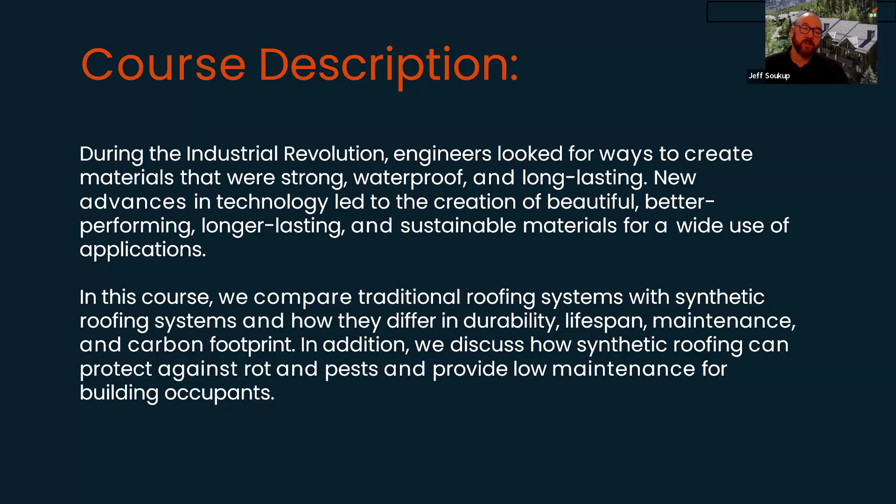In this course, we're going to look at some traditional materials, some traditional roofing systems. We're going to look at some synthetic roofing systems. A lot of this, we are going to be talking about exterior building products as a whole, so we're not going to be bogged down in roofing. So for the roofing aficionados, sorry to disappoint, but we will talk a little bit about everything.

Our learning objectives today. So again, just looking at the history of synthetic building materials, what was really the impetus for the creation of these materials, and then how did we create these great products? Look at some of the traditional building products that were natural materials that have largely turned to synthetic.

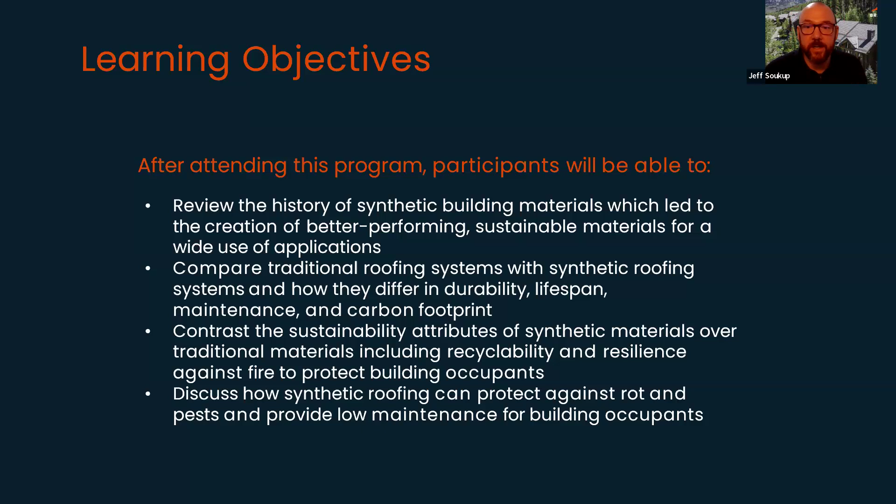Compare and contrast some of the sustainability attributes of synthetic materials over traditional materials, looking at their recyclability, their durability, protection against fire, and then finally looking at synthetic roofing, how it can protect your structures from rot, pests, wind, or other problems that we're dealing with frequently.

So this light bulb is just a little bit of an example to kind of prime the pump. So looking at innovation, without innovation, where would we be today? This light bulb is an example of, we've gone from the traditional filament or Edison bulb to our new LED bulbs.

I can set my current LED bulbs using an app on my phone. I can sync them up to my Spotify playlists or my playlists. They're tremendously smart or efficient. They cost less. Their life cycle cost is very minimal. They are the norm or the standard.

We've actually restricted the ability to manufacture and sell old filament bulbs because these LED products or other current light bulbs are just a better product, and they've come to be through innovation. We've tired of replacing the old bulbs, turned to a more energy efficient product, turned to a more durable product, and we've changed the norm to where they are the standard now.

With that kind of thought process or that type of innovation in mind, we're going to look at other exterior building products that have made that transition from natural material to a synthetic counterpart that in many ways is a better performing, lower cost, and more efficient product.

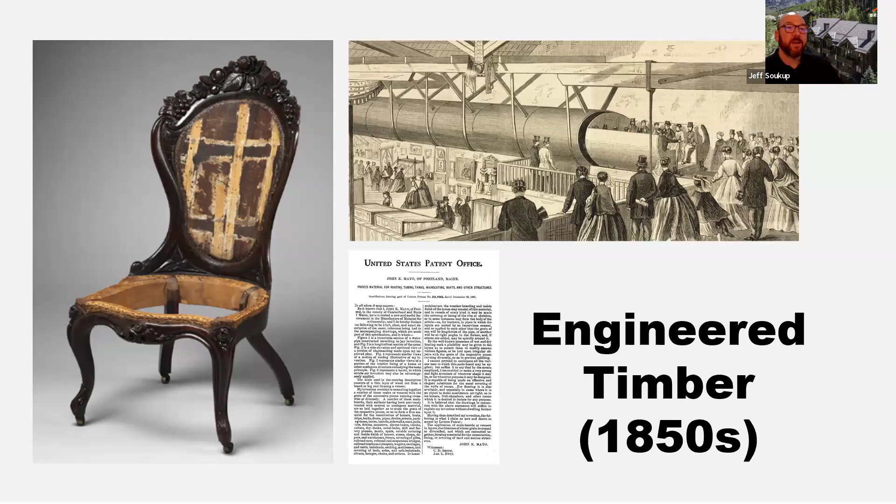The next, celluloid. So this is the first semi-synthetic plastic. Celluloid was created again in the mid 19th century, post Gilded Age. When you were a distinguished family, you always had a billiard table, and at this time we had really decimated the elephant and rhino population throughout Asia and Africa. So, billiard balls require ivory. All of the ivory supply was fairly decimated, so they were looking for substitutes. So again, kind of doing more with less, creating substitutes for things. A billiard ball manufacturer in New York City decided to create a $10,000 contest for anybody who could create a suitable replacement for ivory.

And John Wesley Hyatt and his brother created celluloid. So celluloid is a mixture of, I believe, cellulose nitrate and camphor. It is a really great material, holds solid over a great range of temperatures, can be polished, has a great hardness, and can hold colors very well. They ended up winning the contest. They were never paid, but John Wesley Hyatt went on to form the Albany Dental Plate Company, where he manufactured, among other things, billiard balls, dental implants, combs, piano keys, everything that we really associate with ivory. But they also were very formidable in the injection molding process.

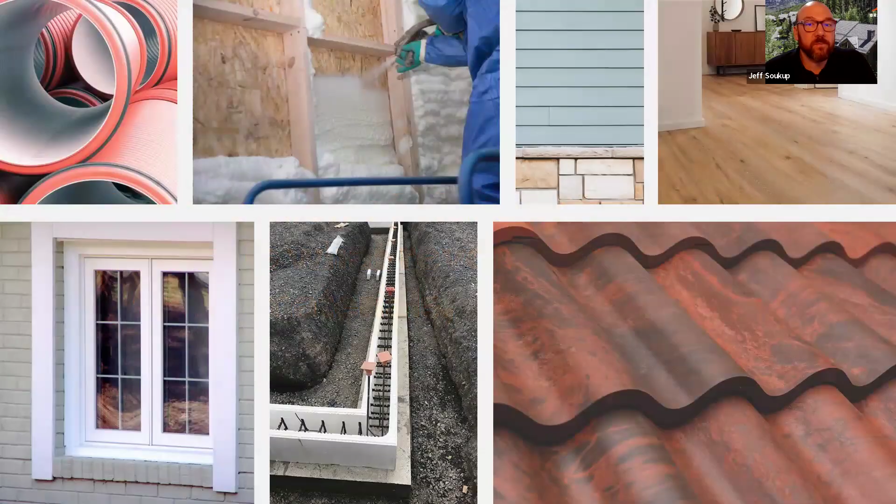Today, building is plastic. The construction industry is the second largest user of plastics, the first being CPG, or consumer packaged goods. I'd argue that the construction industry is a better steward or user of plastics, by and large. We're using these for long-term material use. We're using them because from top to bottom, they're high performance, durable, and now we're turning the tide where these can be considered sustainable products if they're manufactured correctly and utilized correctly.

So just looking at some of these product categories that have gone from a largely natural material to synthetics, starting with siding. So siding receives a ton of attention because it protects our buildings from the outside elements. It's what we're looking at mostly. Vinyl siding has improved tremendously over the years. It's very durable, it's affordable, has very consistent colors, and can remain virtually maintenance free over its life.

Engineered wood siding, if you're moving up, looking at some of the really great engineered sidings available, can mimic the look of natural materials at a fraction of the cost, and even your composite materials or fiber cement. These are manufactured with durability and longevity in mind.

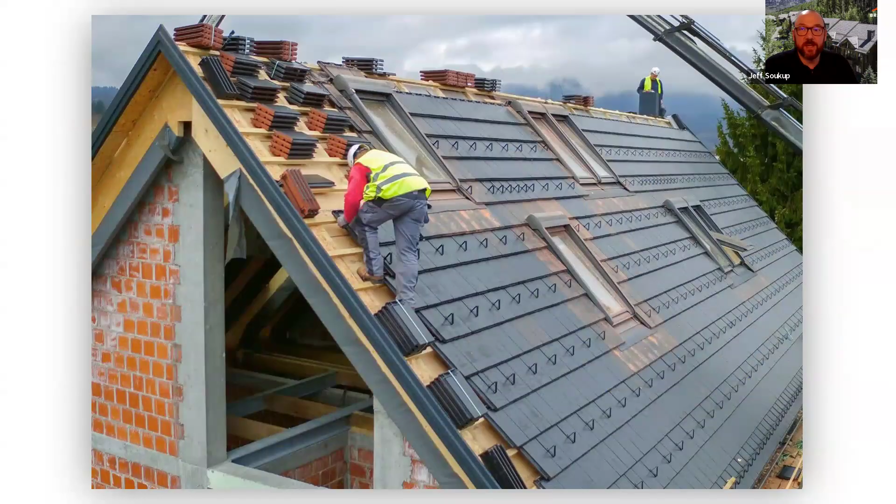The maintenance, even the installation is becoming more difficult, finding the skilled artisans to install these materials. I know we're joining from all over the country. Regionally, you can probably find a good slate hanger, but in many areas of the US you cannot. So looking to find different options that can achieve these visuals, not having to over engineer your roof structure to accommodate the weight of these tiles, is something you want to consider.

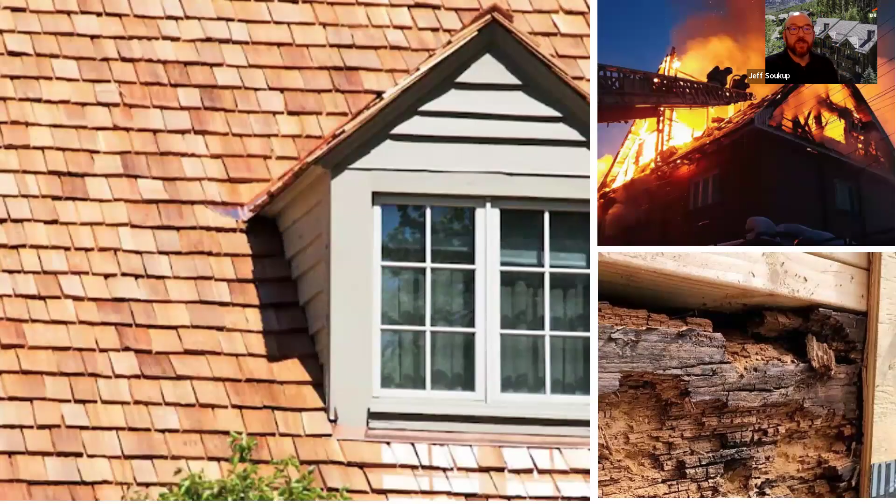These materials will last forever, or a very long time, but these days they can be difficult to maintain and keep looking beautiful. Cedar shake, or different shake materials have been a big challenge for a lot of people in recent years, with the continued problem with wildfires, deforestation, and then just getting insured is becoming increasingly difficult. So seeking out products that may replicate this, and be a little bit easier to maintain and install over the course of their life is worth considering when you're specifying material.

The costs associated with having these materials is not just with installation. There is a cost to our environmental impact. So are we deforesting? Are we mining or quarrying for slate? Most of the slate that we're seeing in the States around here is being imported these days. Thinner profile, not as nice colors, a significant carbon footprint being transported to the U.S. Just a lot of things to consider.

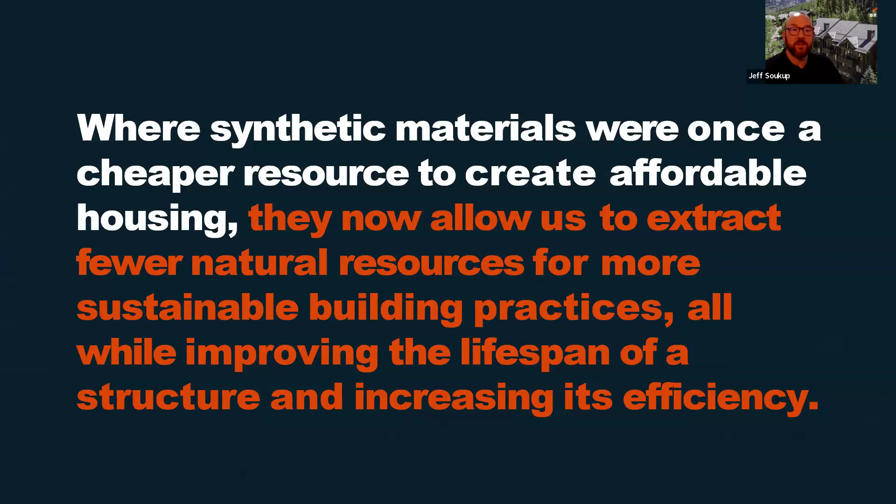If there are materials that are manufactured from recycled existing materials that we can repurpose for roofing, that would be a unique option. So this is where I'm going. A lot of these synthetic materials are recycled, so it's very counterintuitive to where we are today. We've been told plastic is terrible for the environment, but it can be a bit of a misconception that if a material is existing and we can recycle it, then it's counterintuitive, but we can take a plastic and turn it into a roof, and it can be very sustainable. So just looking for these opportunities is keeping an open mind.

So looking at some of these roofing materials, synthetic roof manufacturing has come a long way. We can replicate many of the existing looks out there, and you're not going to see the degradation that you would over time. Gen 1 of synthetic roofing had a lot of issues. If you think about it, you take a black piece of plastic, put it on a roof, and let it bake in the sun, you're going to have some issues, and a lot of lessons were learned over time.

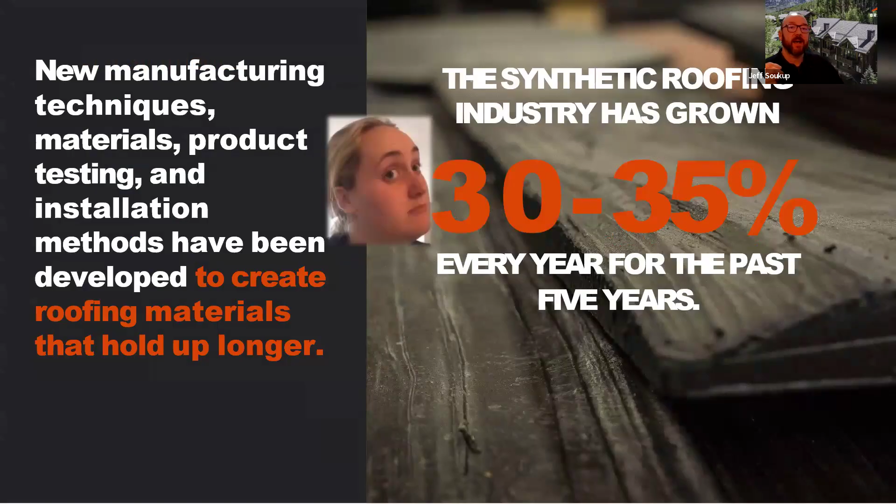There are a lot of manufacturers that have come and gone, but the current manufacturing process, the advances that we've made in polymer technology and manufacturing technology have improved over the last 5, 6 years now. The industry itself has grown 30 to 35%. So real significant adoption. We're still in a very early adoption phase of synthetic roofing, but it's becoming a bigger and bigger category in the roofing industry as every year goes by. Now modern synthetics are considered high-end, premium products. You can achieve some really beautiful looks with these.

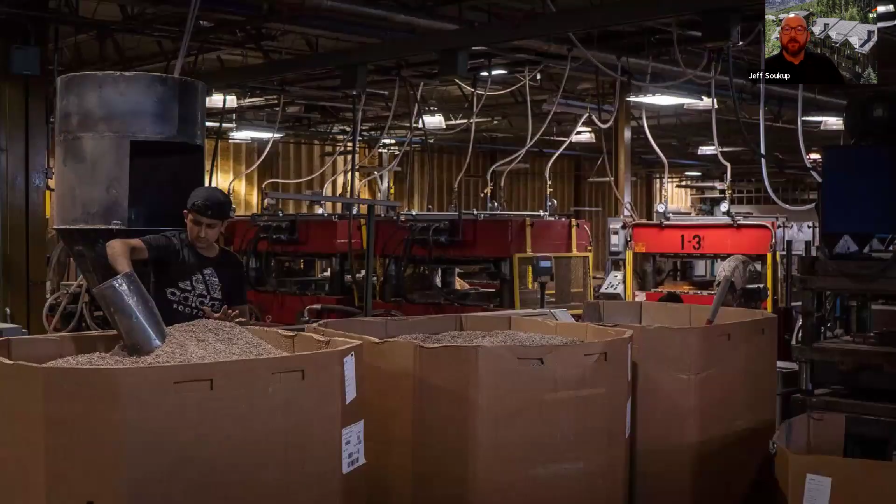So looking at some of the synthetic roofs, what are they made of? A lot of the times, what are your products made of? Mostly plastic, some rubber. Some manufacturers are using mostly virgin material, where many manufacturers are using recycled content for this.

Using both types of recycled content, so your post-industrial and post-consumer. One of the biggest challenges that we have as a manufacturer: post-consumer, we still as a nation are not very good at recycling. So with post-consumer it's very difficult to find a reliable, consistent stream. But whether it's post-industrial or post-consumer, we're still diverting material away from the landfill, trying to flatten the curve of embodied carbon.

Then just looking at, I'm getting ahead of myself, but the ability to recycle after a useful life is very important. Mineral pigments are big in the industry. Mineral pigments or inorganic pigments are not going to degrade like a synthetic pigment would under UV. So we use mineral pigments like carbon black, red iron oxide, green earth, azurite, your burnt umber, indigo, all of these to really get that very durable, UV resistant, fade resistant color that you see with natural products.

As I was saying, many of these materials are made from recycled materials themselves, but they're also able to be recycled at the end of useful life. So it's not as simple as going down to the local recycling center, but many manufacturers do have recycling programs. You can get that big green bag, take all of your roofing off and send it back to the factory, and it can be turned right back into another roof.

So one of the bigger questions that we get is how are these roofs tested and how do they perform? The biggest concern, obviously, is fire. Plastic burns, we know that. So how will it perform? For fire, synthetic roofs are tested exactly the same as any other roof product would be: the UL 790 / ASTM E108 tests. So this is three different tests.

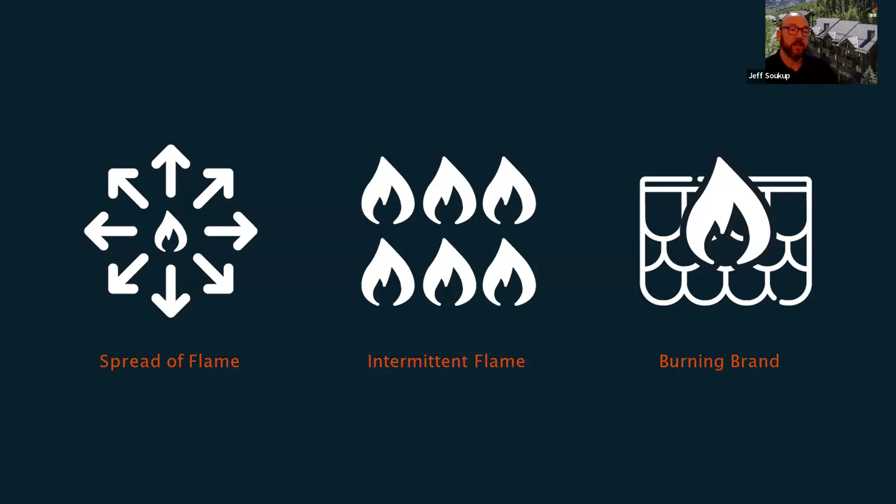The burning brand test, which you see here: essentially we just take a burning satchel, throw it onto the roof structure and see how it burns. Does it go out? Does it continue to spread? Your spread of flame tests and your intermittent flame tests. So these are all meant to mimic how a roof would interact with a fire in real life. After these tests are done, the results are aggregated, and then your roofing material is assigned a classification, Class A being the most effective, Class C being the least effective.

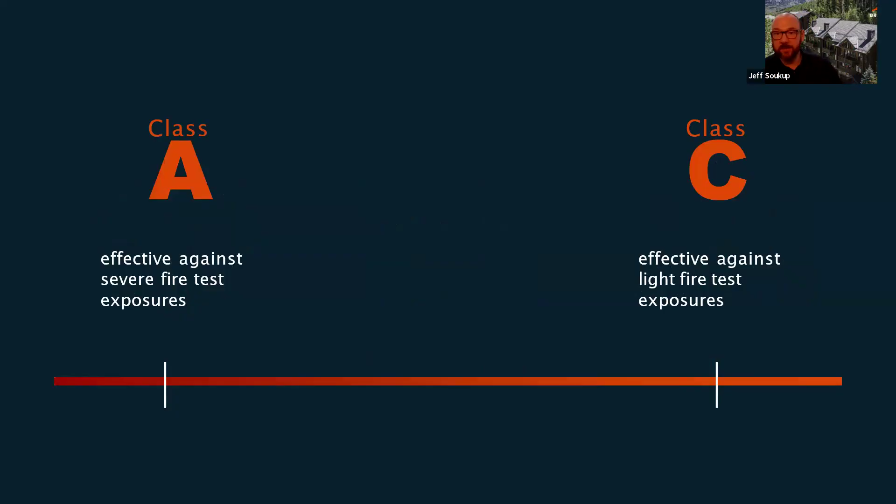So not getting crazy here with the naming or the classifying. Most synthetic manufacturers will receive a Class A or have a Class A option. Many of these manufacturers will have a Class A composition tile and then also a Class A assembly.

Impact resistance is a big one these days. I think in the mid 90s, a bunch of catastrophic storms came through the Midwest and devastated many roofs out there. The insurance industry wanted to develop a way to evaluate roofing materials, so they came up with the aptly named steel ball test. Essentially, we drop a steel ball from 20 feet, graduating from 1.25 to 2 inches. You drop the ball twice from 20 feet in the same spot and then evaluate for moisture penetration afterwards. So this will tell you how resilient your roof is to impact.

Many of the leading synthetic manufacturers will achieve a Class 4. There's also a bit of a misnomer as far as Class 4 or impact resistance goes. When I first joined the industry, I thought impact resistance would prevent moisture penetration, but my roof's also going to look nice afterwards. This doesn't tend to be the case. A Class 4 impact roof will still dent; a standing seam or an asphalt can be a Class 4 and still show a lot of signs of dents.

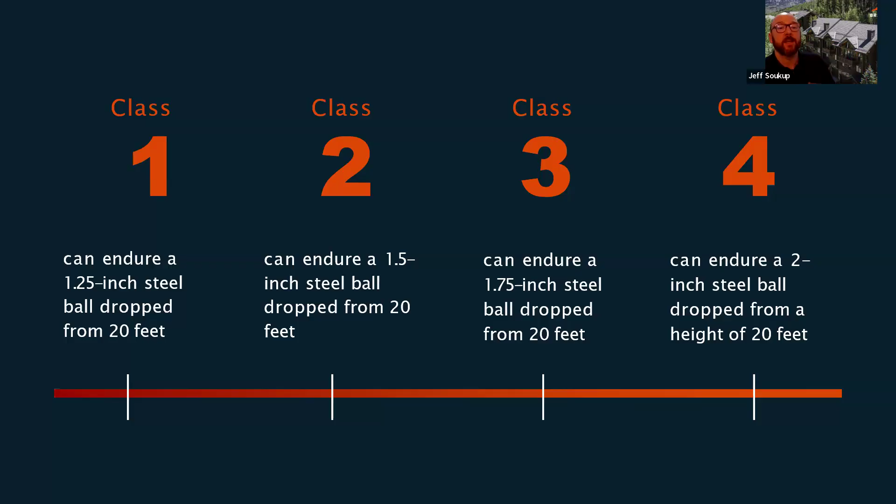That's part of the benefits of the synthetic roof: because these are plastic and they're very resilient, you're not going to notice a lot of damage. So Class 4 will not allow moisture penetration, and it will also look beautiful afterwards.

Wind: the gold standard here is going to be your Miami-Dade County NOA, or notice of approval. All of the synthetic manufacturers, to my knowledge, have these. So you're going to want to look for manufacturers that have met the standard and can warrant up to 80 mile per hour winds. Many of the synthetic roof tile manufacturers will warrant up to 110 or even 130 with some modified installation techniques.

And so this is really about future proofing. We want to make sure that we're designing for today, but also designing for all of the new weather that we're going to experience 10, 20, 50 years from now.

Many of the synthetic roofing manufacturers are working to produce cool roof compliant materials. So for your Title 24 California cool roofs or your building energy efficiency standards, many of the synthetic manufacturers have products that are compliant and meet the solar reflectance required in these areas, but also making sure that we have products that can withstand increasing sizes of hail or greater winds. We want to make sure that we're doing everything we can to design appropriately for today and for years from now.

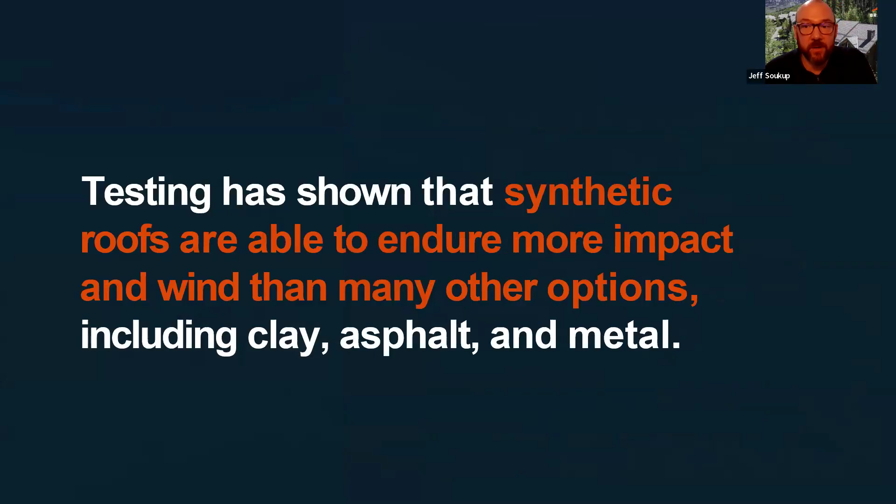Testing has shown, just to beat you over the head with this, that synthetic roofs are able to endure a ton of impact, more than many of the other traditional options that we see out there. Another benefit is, because these synthetic materials won't absorb moisture, they're very immune to the freeze-thaw cycle as well as extreme heat. So in areas where you would typically have to be very careful with what you're specifying, you're a little bit more insulated or protected with a synthetic roof.

So styles: the materials out there these days are creating some really beautiful products, great products that mimic natural slate with a lot of variegation. Your shake, Spanish barrel tile. This isn't just a residential product. It's great for institutional use. So a lot of universities, we have historical buildings. We don't want to deal with the ongoing maintenance of a natural material. So synthetic is a really great opportunity here, especially with the sustainable attributes that you associate with synthetic roofing.

Again, more opportunities for different verticals. So whether it's higher ed, historical restoration, commercial, multifamily, just great opportunities. And these are going to look just as good or very close to what they would look like in 20, 40, 50 years. The biggest knock on plastic is that it doesn't go anywhere. And I think the synthetic roofing industry has done a good job of saying, let's turn that negative into a positive and use it as an advantage. So we are taking the biggest knock on plastic and using it for roofing as a benefit.

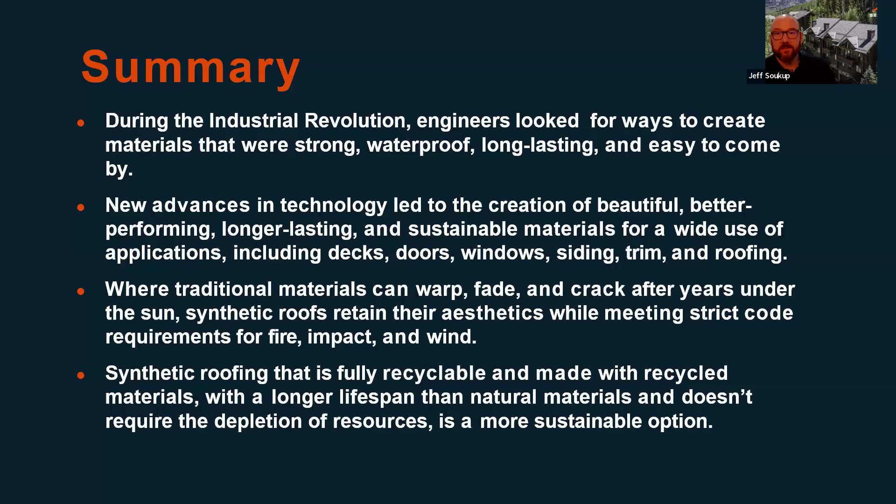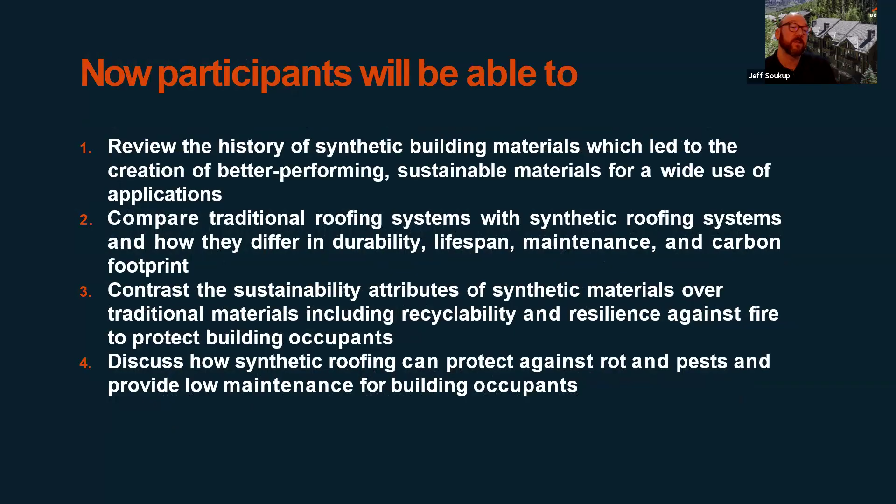Now you'll be able to discuss some of the synthetic achievements, the innovations, look at some of the synthetic roofing systems and compare them with traditional roofing systems, look at sustainability attributes of synthetic materials, and then discuss some of the benefits of synthetic roofing. So that is the CEU portion.

If you have any questions, or I'll briefly run through Brava. So Brava is a manufacturer of synthetic roofing, if you didn't know already. We were founded in 2008. We're manufactured in Washington, Iowa, which is about an hour south of Iowa City. At Brava we manufacture slate, shake, and Spanish barrel tile.

We are soon adding a fourth. We're going to add a flat tile. And we are also bringing on a second plant outside of Atlanta, in a town called McDonough. So we're trying to keep up with the demand for our product by adding capacity. We have been growing significantly for the past 10 years and bursting at the seams in our plant. So it's a great move for us.

So Brava is very sustainable. We will qualify for LEED. Brava is manufactured from mostly post-industrial material, but some post-consumer. We have a big challenge finding a steady stream of post-consumer material, which is why we largely tend to use post-industrial, but still diverting from landfill and making a very sustainable product.

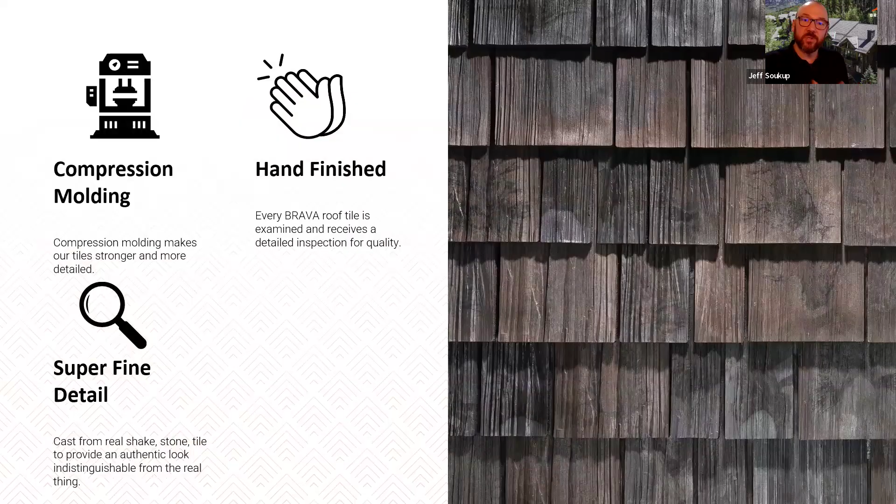When it presses, it creates this variegation that you see in the wood or in these shakes. This is a better example of it. So you're getting unique molds and every single tile is going to be unique because of this compression molding process. I think that adds to the authenticity. The other advantage is you get really super fine detail. Plastic or polymers don't want to go into corners or small places, but because we are compression molding and not injection molding, we're able to fill those little nooks or crevices and create these very fine details.

Other benefits. I don't like saying zero maintenance. All products are going to have a little bit of maintenance. You're going to have to blow off your roof if you have a lot of leaves, or maybe get up there and wash a spot or two, but largely way less maintenance than even a traditional asphalt roof. Wind resistance: Brava has been tested up to 211 miles an hour without failure. We warranty our high velocity install to over 130, which is your Miami-Dade or Florida Building Code approved.

Very resistant to fading because of our use of mineral pigments. Brava also manufactures a high elevation UV resistant formula, which we typically sell in the mountainous west regions. Surprisingly, being at a high elevation, because we're that much closer to the sun, increases the speed of fading. So we have a special formulation for that.

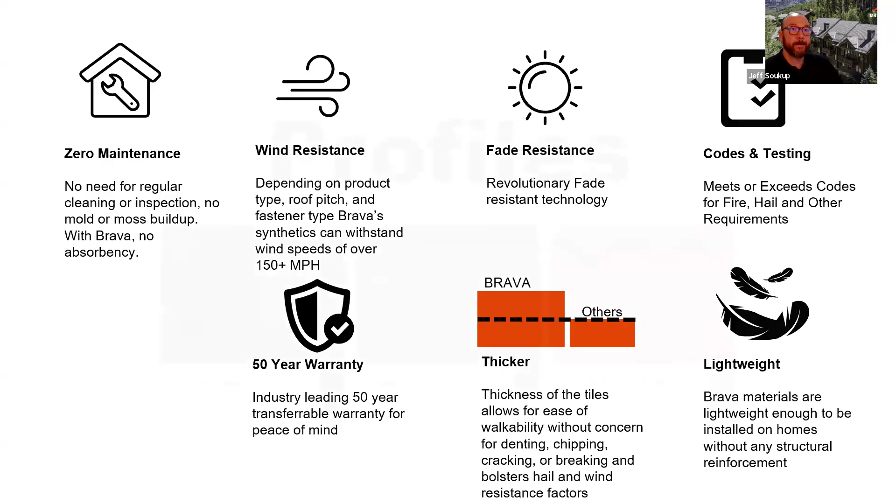Brava is going to be thicker, lighter weight. So if you can install an asphalt roof on your structure, you can install Brava. Brava is about 300 pounds per roofing square. So just a lightweight, very durable product.

So just looking at some of our different profiles and some of our installations. Again, gorgeous shake looks. This is an arboretum. We do really wonderfully with park services. A lot of these services are tired of replacing shake every 10, 15 years. The durability of shake is not as robust as it was, because we're using a lot of farm grown lumber. So a lot of the park services and other areas are turning to synthetic.

Just some real neat houses. This house was in the Wall Street Journal for an obscene price tag. But just some really cool projects that we've done. This is one of my favorite details on a roof that I've seen in a long time.

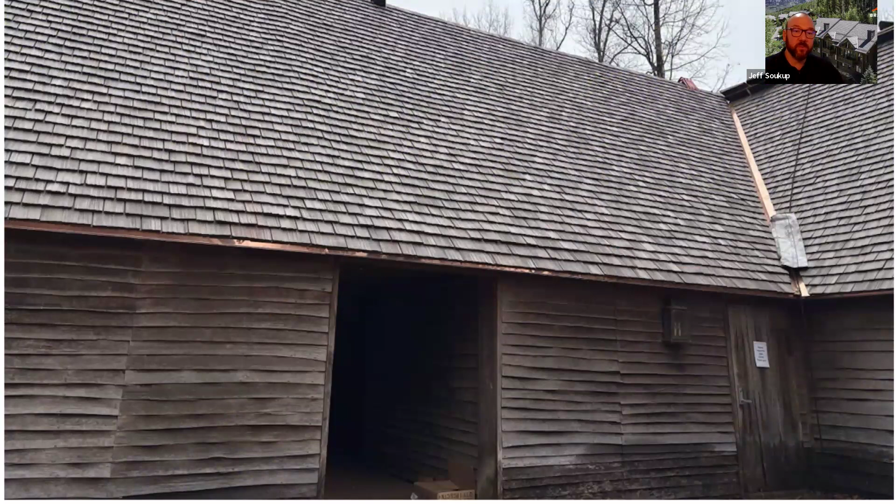Just obviously, in my very biased opinion, I think this is very authentic and natural looking. This is a cool project. So not the most beautiful building, but this is Henrico County in Virginia, or Henricus Historical Park. The building was from somewhere in the 1700s, and we redid the roof, and I think it's a real testament to how authentic Brava looks.

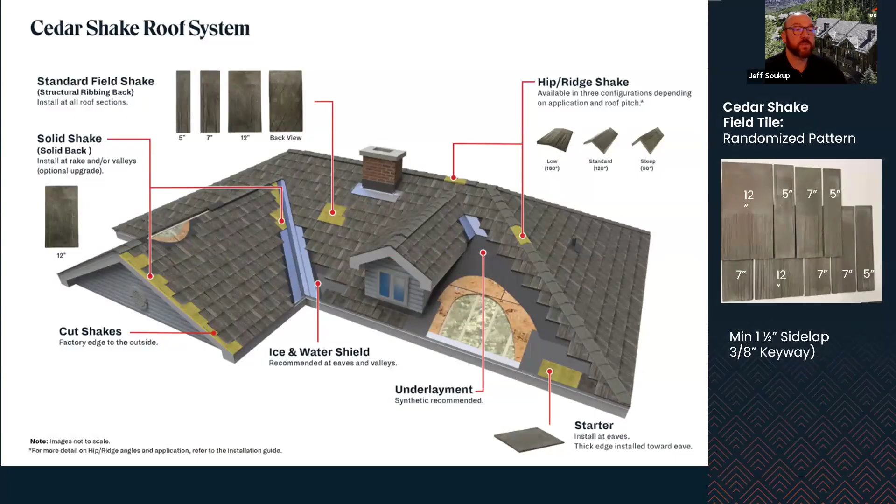These are our different colors. You can do a custom color if you were looking for one, but typically we try and keep to the natural cedar color life cycle. We have our Title 24 compliant cool roof colors that are available to you. Coming in 5, 7, 12, and we also have a solid tile for your rakes and valleys.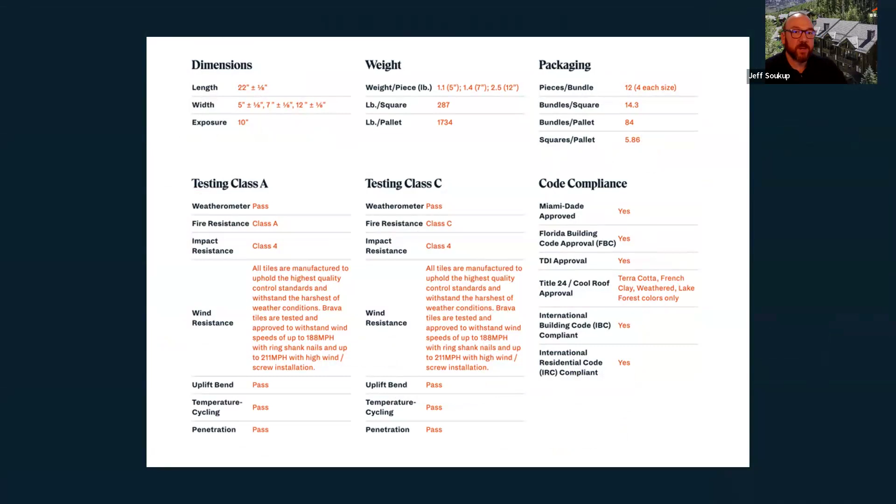Class A: we have a Class A composition tile or Class C. You can achieve a Class A, but it's going to be more expensive. Class A can also be achieved through assembly. So we just want to see a radiant barrier included. Slate, very compelling or authentic look.

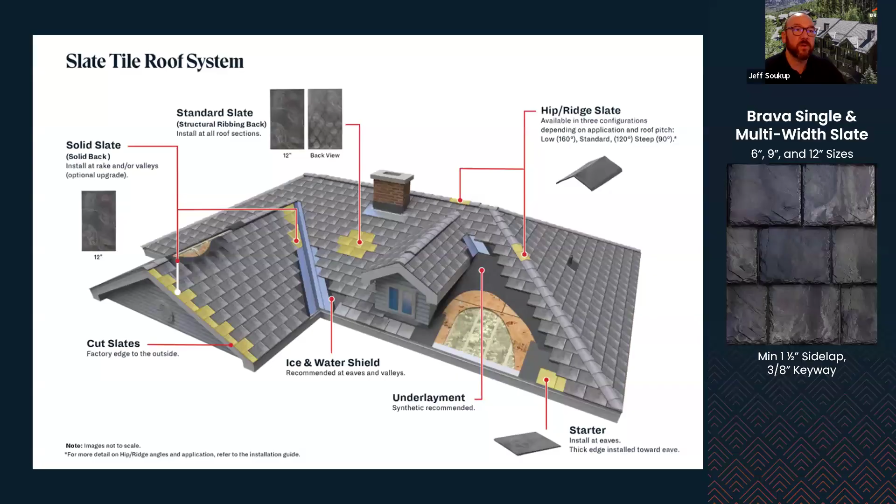Different colors. We have standard 12-inch or multi-width in 6, 9, and 12. We have all your hip ridges, components, starter tiles. And then your Spanish tile.

This church was hit by a few tornadoes within weeks of each other 3 years after the install, and they only lost a handful of tiles. So it was again another testament to the durability and wind performance. Historic train stations, lots of multifamily. So throughout the southeast, southwest, just a great opportunity to specify these materials that are going to last for you.

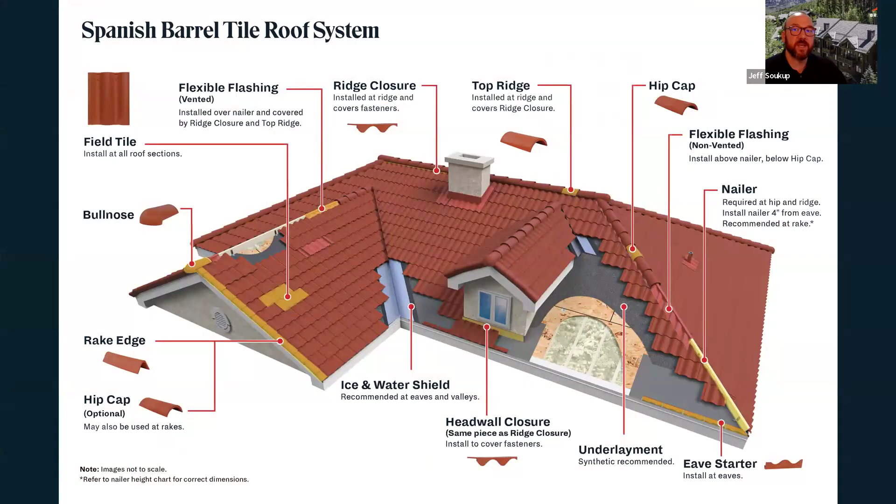Our resources are available through Acelab. We have new Revit system families. We have light PBR textures or 3D rendering textures available, new specs, and a comprehensive suite of architectural details for you.

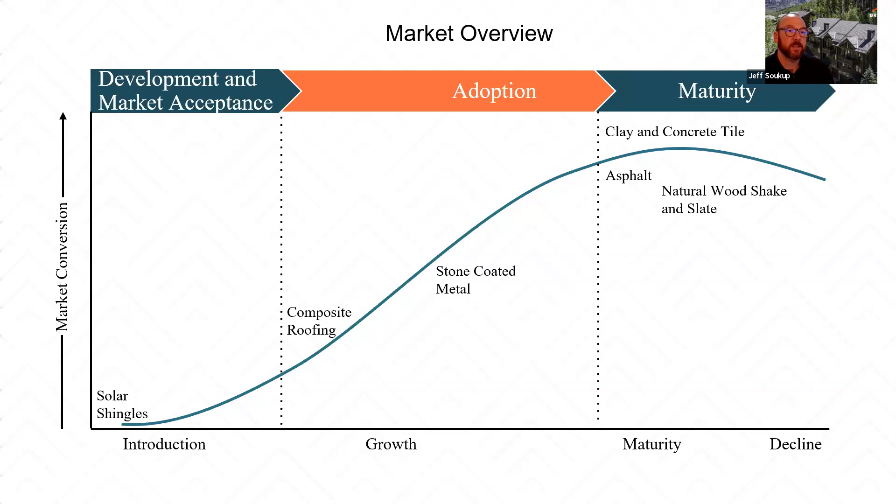This is where we think we are in the adoption curve. So if you think where fiber cement siding or composite decking were in the early 90s, mid 90s, I think that's where we currently are. You're just going to see more and more synthetic roofing coming out because it does have such a great story. It's a greater upfront investment, but long term your life cycle cost is way less than replacing your asphalt shingles every 10, 15 years, even though they're supposed to be rated for 25 years, or doing any maintenance with natural cedar, clay tile, concrete tile, slate.

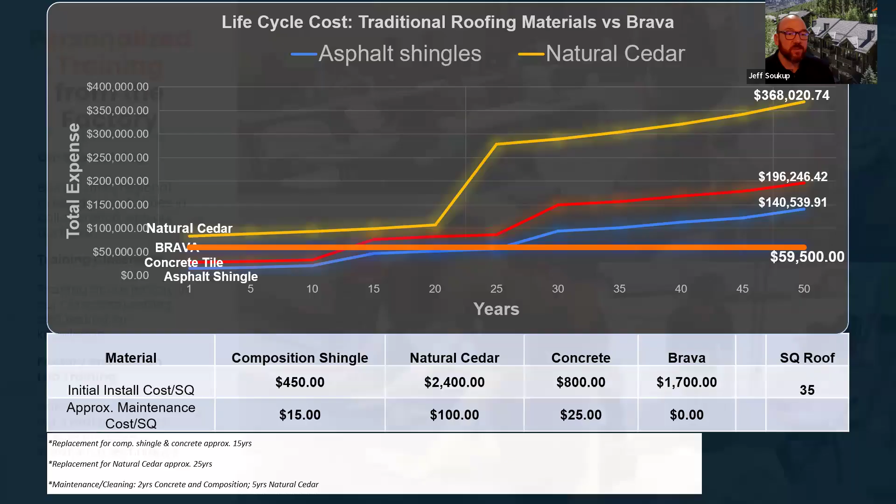In this last portion: we do a lot of training, so we offer certified installers, but it's not required. We just want to make sure that the subtle differences required for installation, mostly leaving a 3/16 to 3/8 keyway in between the tiles, are followed. But we are here to see you from project concept to installation and then post.